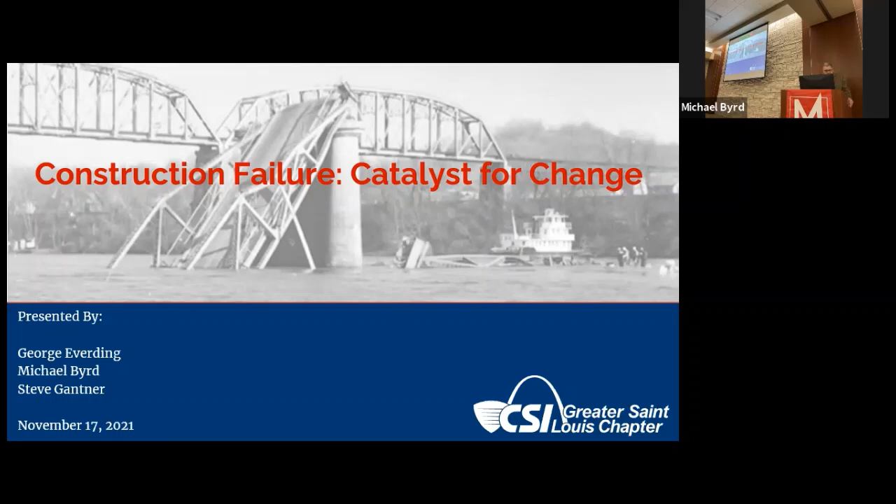I want to see if I can do this here. It worked.

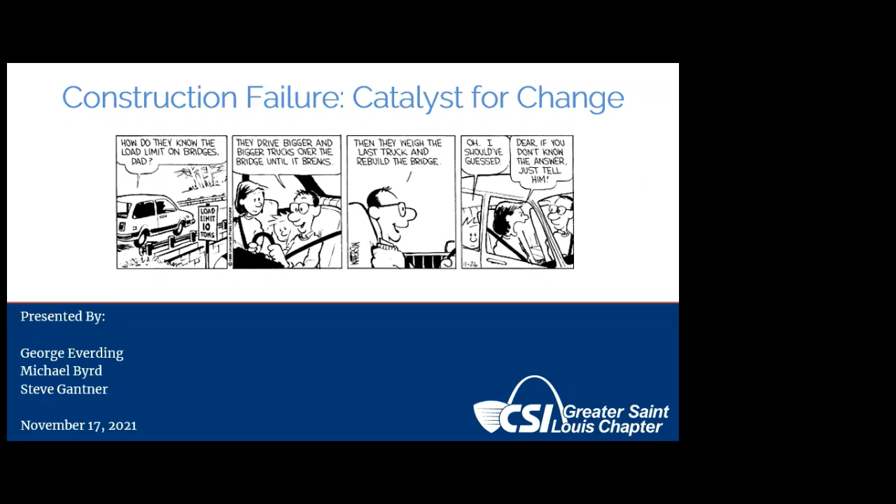Trial and error, as Calvin and his dad are discussing here, has been a means of problem solving for a long time. Calvin and mom and dad are riding across a bridge with a sign that says load limit 10 tons. Calvin asks, how do they know the load limit on bridges, Dad? And Dad, of course, being a dad, has the right answer. They drive bigger and bigger trucks over the bridge until it breaks, then they weigh the last truck and rebuild the bridge. Calvin says, oh, I should have... Mom says, dear, if you don't know the answer, just tell him.

I thought this was appropriate for what we're talking about here, because a lot of what we do in this business historically has been trial and error, and I think it still is very much part of what we do.

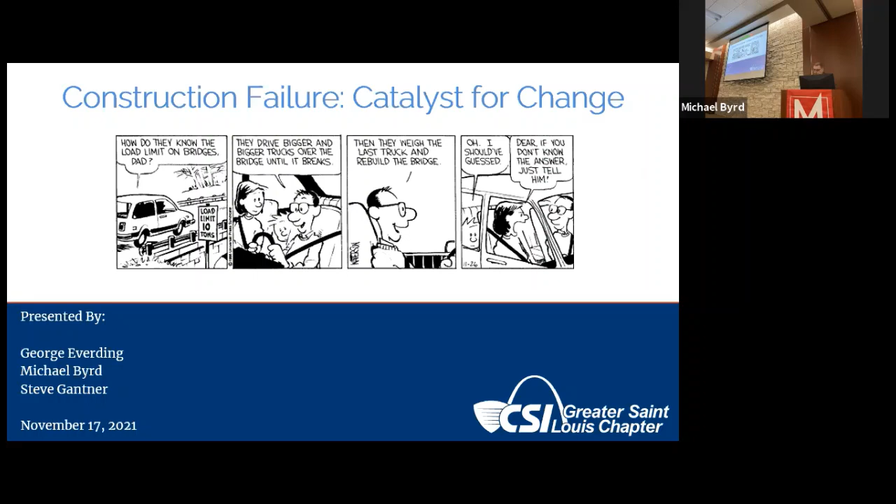The focus is not so much on the failure. We're going to need to talk about some tough stuff. And I have to tell you that in doing the research for the program I was going to put together, it was really difficult. There are a lot of things that could have been talked about tonight.

Neil deGrasse Tyson has a wonderful little, very short 15-second YouTube where he's getting ready to speak and they're doing the sound check, and they asked him to say anything. What he said was, the universe is a deadly place. At every opportunity, it is trying to kill us. And he's absolutely right. Our little Earth, in the scale of the universe, is the only place that we can survive. And for people in construction, Earth is not exactly friendly.

Gravity is not our friend, particularly as we get older. Hurricanes, tornadoes, earthquakes, wildfires—we have to deal with that in everything that we build. And what about human stupidity, or human hubris, or human just lack of basic knowledge? Not necessarily making mistakes, but just not understanding the right questions.

Given all of this, the question really is not why so many failures occur, it's why so few do. And that's the focus for this year. We're going to look at those things that we've done right in response to what we learned when things go horribly wrong.

Because we're all together, we're going to quiz the audience. If you have questions at home, please put them in the chat and we'll ask Hank to ask them. My question to you all is—like a lot of response, one at a time—when you think about failure, what leaps into your mind? It can be a personal project you worked on, or it could be something in the news.

When we talk about failure, George mentions the recent collapse of the condo. Anyone else? Why are you guys shy? The Regency in Kansas City, right? All of us who were licensed at that time had to pay twice our fees in order to defend that. The Missouri board was involved in that.

Anyone else? 35W—I-35W in Minneapolis. George is probably painfully familiar with that.

So someone else, what about like a product rep, something that happened in their experience dealing with a product? It doesn't need to be notable. Windows—design pressures. George is talking about how wind loads on windows was not very well known, and that windstorms and that sort of thing.

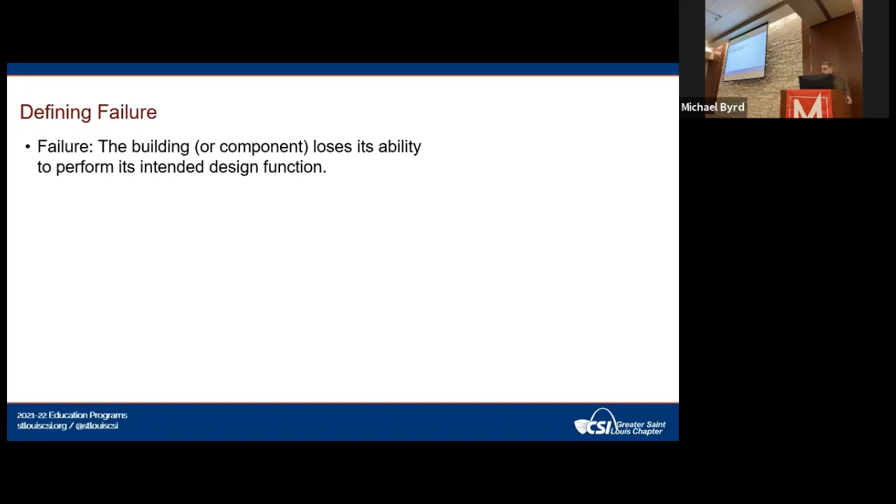A catastrophe. And this is actually from the U.S. Code. A catastrophe is defined as a natural or man-made disaster with extraordinary level of casualties or damage. I think we can all agree with that. There's probably a number of other ways we can define that, but a catastrophe is big scale.

Now, NASA defines a catastrophic failure as sudden and total failure from which recovery is impossible. Think the space shuttles, right? The interesting thing is that these last two are in a little bit of a conflict. You can have a catastrophic failure without a loss of life. If the entire system is damaged to such a point that it cannot be used, that's a catastrophic failure, right? And I'll go into this a little bit more as we go through it.

So here are four different areas of failure. Structural failure, many of the ones we talked about were structural. A performance failure, our product reps, that's kind of what you deal with. Aesthetic failure is the paint fading, right? And a financial failure. The financial failure is sometimes as a result of the other types of failure. Sometimes it's separate from it. You can have a structural success, a performance success, and an aesthetic success, and still have the failure.

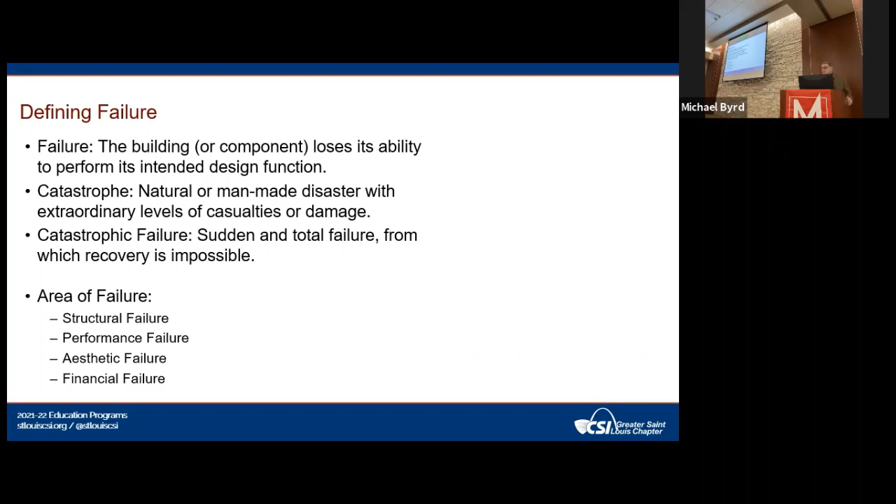And the other thing is you don't have to be in one of these areas. You can be in many of them, right?

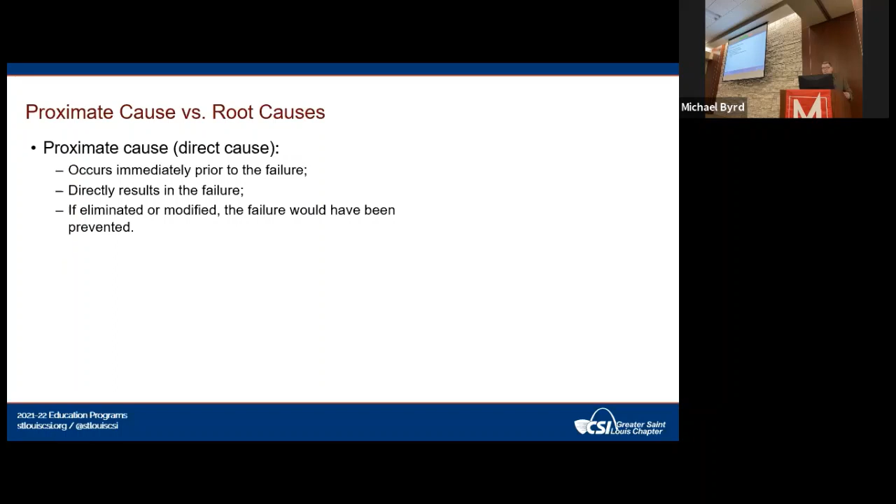The cause of the failure: proximate cause, think of proximity. It's the direct cause. It's what happens immediately before the failure that results in the failure. And if the proximate cause isn't there, you don't have a failure. I'll explain this a little bit before we get off the slide.

Root causes are underlying causes. There are generally multiple root causes in a failure. They contribute to the proximate cause. So to give an example of this...

I think you mentioned Hyatt, right? The Hyatt Regency. The proximate cause is a weld failed, allowing the supporting rod to pull through a box beam, causing the walkways to fall. If that hadn't happened, if it had survived that T-dance with people jumping up and down, there wouldn't have been a failure. Now, it may have happened the next week, right? But that's why it's a proximate failure. That's what actually caused the problem.

But the root causes are that the design was structurally incorrect. And the design was structurally incorrect for a couple of reasons. One, the dance party was a much higher load than anyone anticipated. And two, the design of the connection was changed, because the design of the support was difficult or impossible to build.

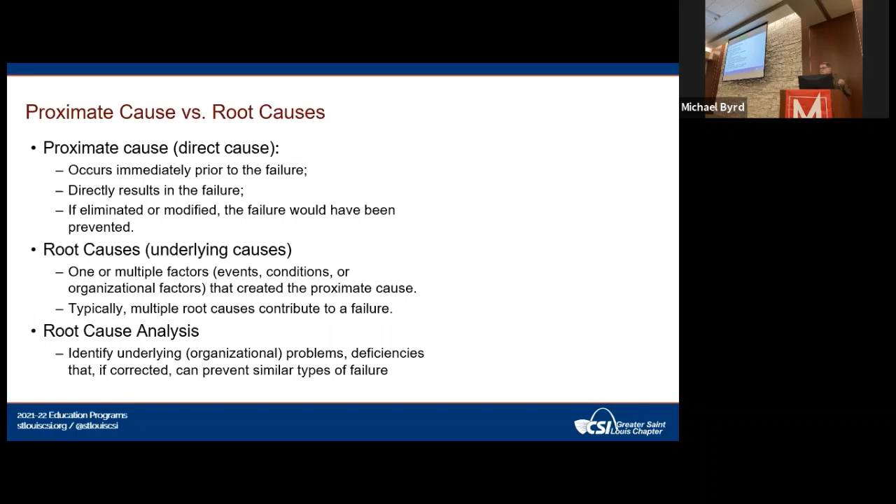So the important thing to keep in mind is that the reason you want to go to the root causes is you can identify the underlying problems. And all of us, whether we're an architect or a product rep or a contractor, in our organization and in our process of doing things, we want that to be correct, so we can avoid the problems that cause failure. So root causes, analyzing them, understanding and identifying where the problems are, and ultimately correcting those problems, is key to what we're going to be talking about here.

And then final slide here, to classify failure: human error, natural causes, or both. Right? Those are basically the choices here.

Fire, explosion, weather—you can read the list. I'm not claiming this is a comprehensive list, but I think it's probably pretty good. I'm going to use these as we go through each of the examples they talk about and try to identify where these failures occur.

The interesting thing is that you can have a crossover here. The San Francisco earthquake—I didn't put the year, it was 1906 or something like that—devastated San Francisco. But 90% of the devastation was not the earthquake itself, it was the fires that came along afterwards.

Failures—I think Steve Bowles and maybe Drew were at one of the meetings we had, and I said my impression was that material failures, the material itself, the product, very seldom fails. We've got a really good manufacturing industry. I asked Drew, in the paint industry, what's the percentage of failures that are not material? They are either installation or surface prep.

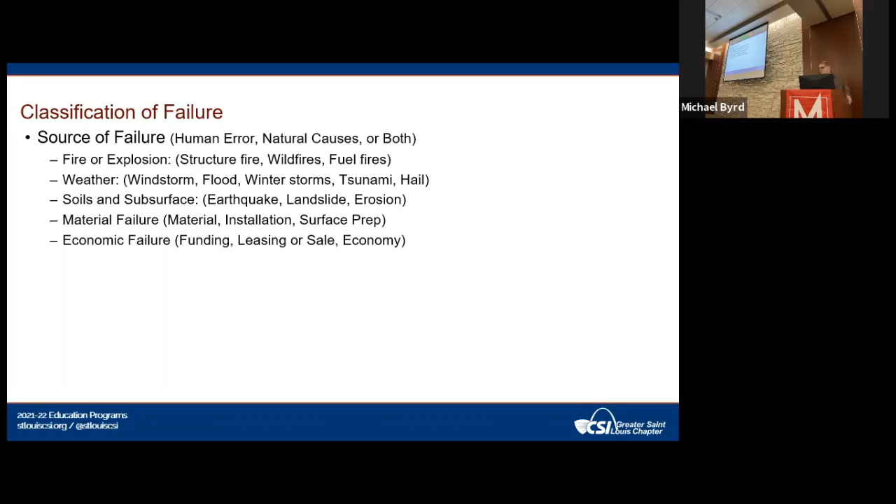Those of you that were at my talk about the Eads Bridge—we love the Eads Bridge, wonderful thing for St. Louis. The Eads Bridge was built, and within 5 years it was an economic failure.

So who's to blame? Point some fingers—me, yeah, that often happens, right? We get to dealing with the failure and we start pointing fingers, and the blame can be grouped into any of the three major parties: design, construction, or owner/developer. But sometimes we get to the point where we say it's nobody's fault—it just happened.

We're going to look at the hard things, and I'm going to need to go through these.

That's great, Tom. Do I need to repeat the question for the audience? Yeah, that's a good idea. We'll take it back to the... oh, okay, yeah. You don't mind.

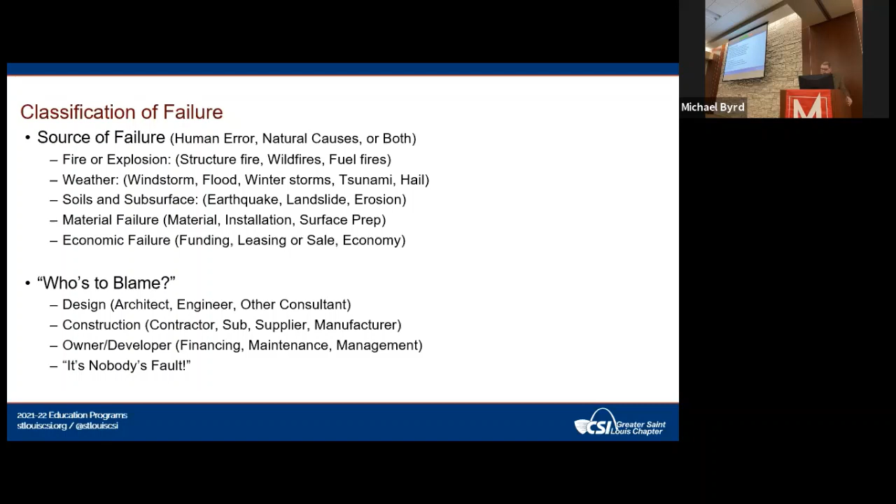Okay, let's get into this. You're fine—half the room, maybe a little more than half the room... This is something I didn't actually learn about in any depth until I got involved with the door hardware industry.

The Iroquois Theater had a horrible fire on December 30th, 1903, and it had been open for only 6 weeks. It was a theater in Chicago, obviously taking advantage of the Christmas season. They had just opened the Mr. Bluebeard play—here's a copy of the playbill, and in the upper left-hand corner it says 'absolutely fireproof.' The theater was advertised as the biggest innovation in Chicago theaters, the showplace and the palace. The proximate cause: sparks from a stage light ignited the stage curtain.

And the building burned. You can see the results of it. One of the reasons that the first couple of tragedies I'm talking about so resonated with people was that newspapers were a big thing, and they were competing, and there were a lot of published photographs of the results - bodies, burned bodies, so forth. I'm not going to show them. If you have an interest in that sort of thing, you can find them online. But it was just horrible, just horrible.

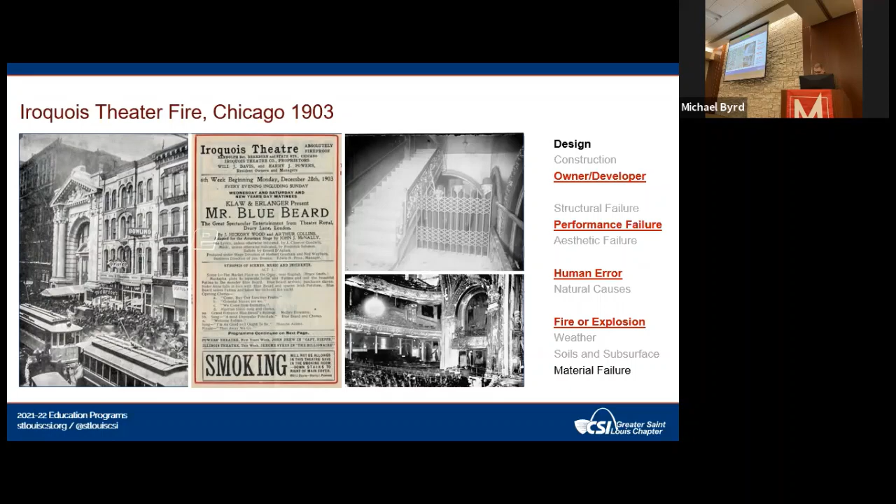And in terms of operation, in terms of management, cities prohibited standing in environments like this. So you can see that our world today is vastly different and vastly safer as a result of what happened - as a result of the theater fire, the Iroquois theater fire. And we'll go to another one.

This is maybe more famous. Who's never heard of the Triangle Shirtwaist? Don't be ashamed, I'm not gonna point you out. One, maybe two.

The triangle - well, let's define what a shirtwaist is. In the early 1900s, women would wear an overgarment when they worked that would keep their dresses clean, right? So it was sort of like a vest. And this was a real popular thing in the 1900s, the nineteen-teens. This is a sweatshop - in the classic case we've all learned about sweatshops, and this certainly was one.

146 people died in this fire, and they were mostly immigrant women, and there were a lot of girls, some as young as 14. You can see a kind of a nice picture of the work environment here. Picture that with the conditions when the fire broke out.

These women are working on a piecework basis, working as fast as they can. That aisle that you see that's all nicely wooden there would be covered maybe a foot deep with scraps from people making shirtwaists - there were bins full of scraps. Proximate cause: an unextinguished match or cigarette butt was thrown into a scrap bin. And you can picture what happened as a result of that.

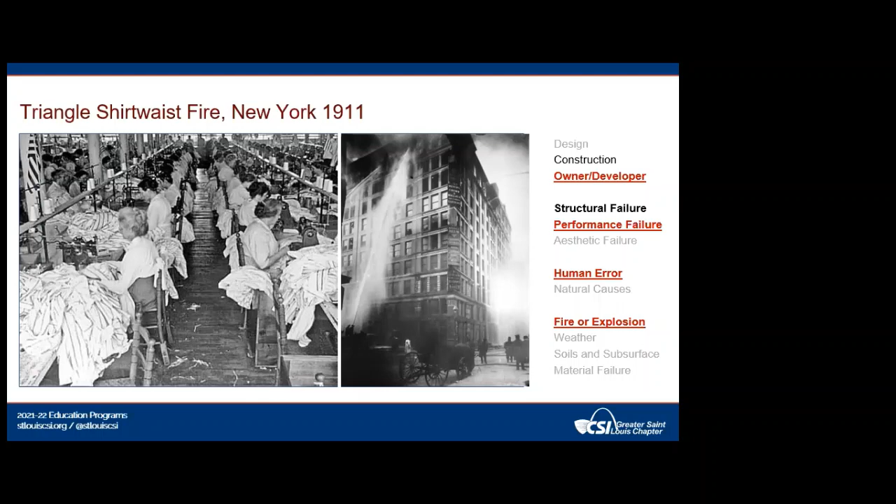There were no audible fire alarms. The exterior fire escape, which they were able to get into, had been damaged prior to the fire and not fixed, and it collapsed. Elevators remained in use during the fire - a lot of deaths are related to that.

An interesting fact about this - we talked about the Iroquois fire, some questionable code practices. Cornell University is sort of the owner of documentation on the Triangle Shirtwaist fire, and they did a study 10 or 15 years ago and made the case that the Asch building, where this factory was, completely complied with code as it was written. This is an issue not so much of building code as ownership and management.

The big deal about the Triangle Shirtwaist factory fire is it led to labor and better working conditions. It led to training with fire drills and procedures, a prohibition of locked exit doors, a re-examination of elevator use during fires, and changes to management and maintenance practices.

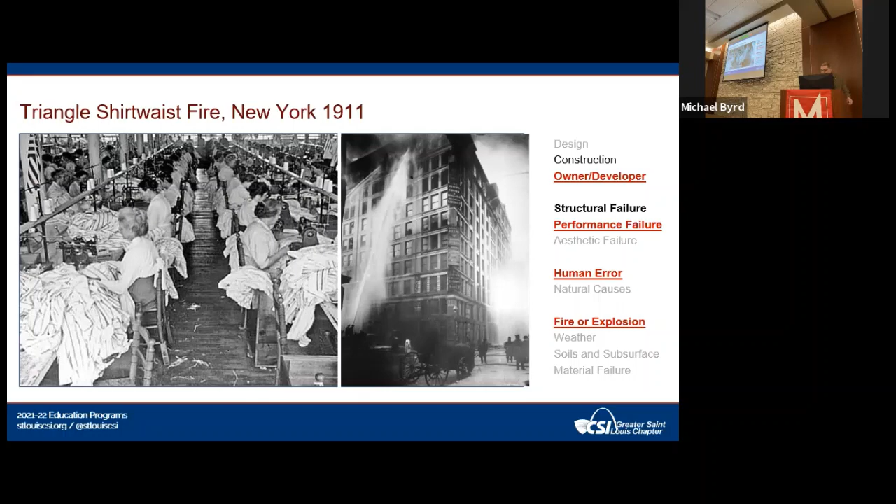So these were the tough ones. I'm going to get a little bit better. Two more difficult ones, and then we'll get some where people don't die. MGM Grand Hotel fire in Las Vegas, 1980. First time you heard about it? Oh okay, that's good.

Deaths and injuries in fire don't always come from flame and heat. The first two we talked about, that was obviously the cause of death. 85 people died in this fire, 650 were injured. Of the 85 that died, only 4 died from flame and heat.

You can see on the photograph of the building and fire, the smoke on the outside is coming from a 1-story wing that had restaurants and delis. The casino owner negotiated with the building department to not put sprinklers in that section, justified by saying it's a casino open 24 hours a day, 365 days a year, so there's always going to be somebody there. But a couple years after it was built, the deli didn't need to be open at all hours.

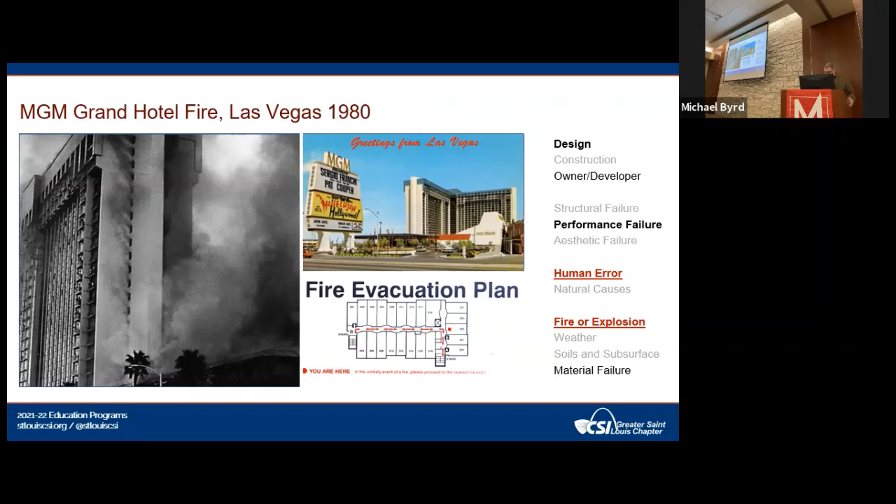So that was a big deal. Flame spread doesn't have to happen only on the inside - fire and smoke doesn't have to happen on just the inside.

The Grenfell Tower fire, which is recent, 2017. Grenfell Tower was essentially public housing. You can see a picture in the upper right of what it looked like when it was built in the 1960s, a kind of plain, brutalist concrete building. Below that is how it was modified just a few years before the fire.

This investigation is still ongoing, but it's pretty clear that the sponsoring district that built this housing - in Britain, every borough is responsible for providing their own public housing - was a lower middle income area. By all reports it was a decent project and people enjoyed living there. I think what happened is the neighborhood got gentrified, and people didn't like seeing this rather plain building in the middle of their town. So they paid to have MCM, metal composite material, put on the outside of the building.

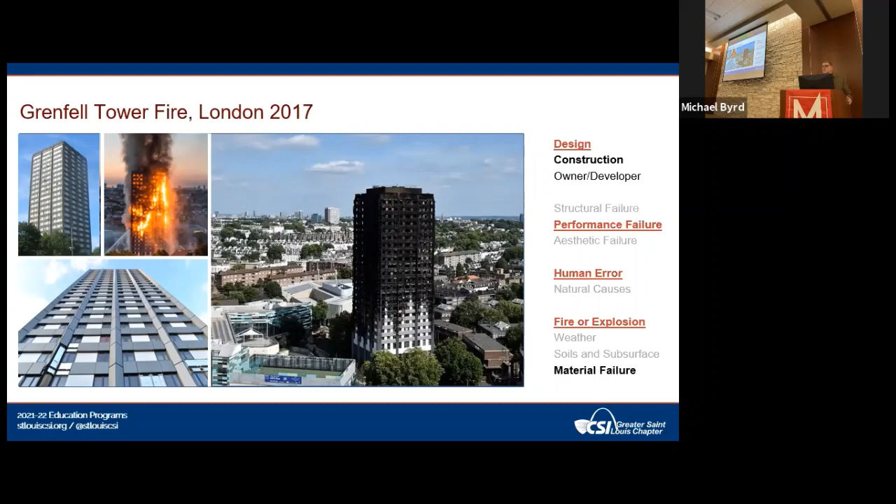The John Hancock building, John Hancock Life, is shown there in the middle. In its current glory, it's a beloved building right downtown, next to H.H. Richardson's Trinity Church.

When it was built, and as it was being built, there was a storm with 75-mile-an-hour wind gusts. 65 of these panels in this building were sucked out, started flying through downtown Boston. As construction went on, as there would be windstorms, more and more panels fell.

It got to the point that it was such a dangerous condition that they started, first of all, as you can see on the right here, infilling the panels with plywood panels. Ultimately, almost every window in that building was covered with plywood. Bostonians called it the plywood palace.

This happened right after I got out of school, so it was a big deal. And I remember, as many of us do, whenever there's a failure, we try to understand it and speculate about how it happened.

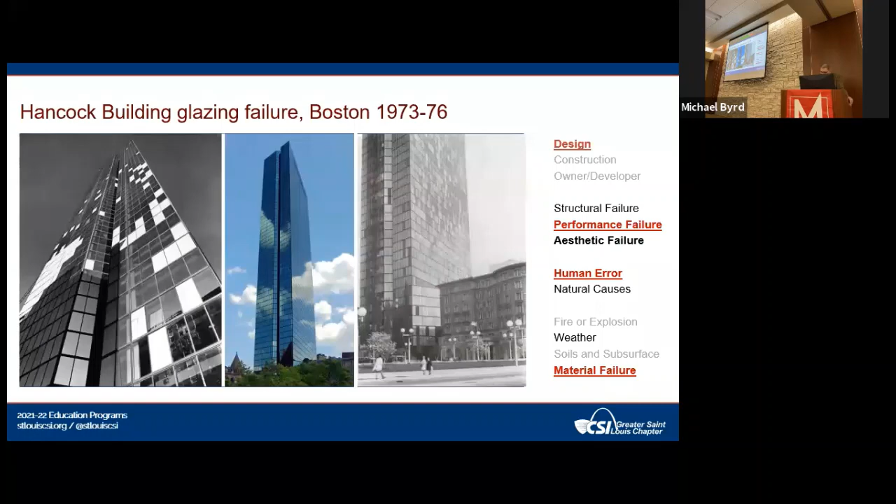Chicago. This is another famous architect - no names here.

This architect was a neoclassicist, so when this building was built in the 1960s-1970s, it was at that time the tallest building in Chicago. His vision was to use Carrara marble. Carrara marble is Michelangelo's Pietà, Michelangelo's David, the Pantheon - very, very white, very, very beautiful stuff. It has lasted for years in many important works of art and buildings.

The image was that Standard Oil would present itself as this white, shining, neoclassic tower.

At this time, new technologies in stonework allowed the panels, which were approximately 4 by 4 feet, to be sawn into 1 1/4 inch thick sheets, as opposed to the typical 2 1/2 or 3 inch slab. So the building was built, everybody loved it, Standard Oil loved it, and the panels fell a few years afterward.

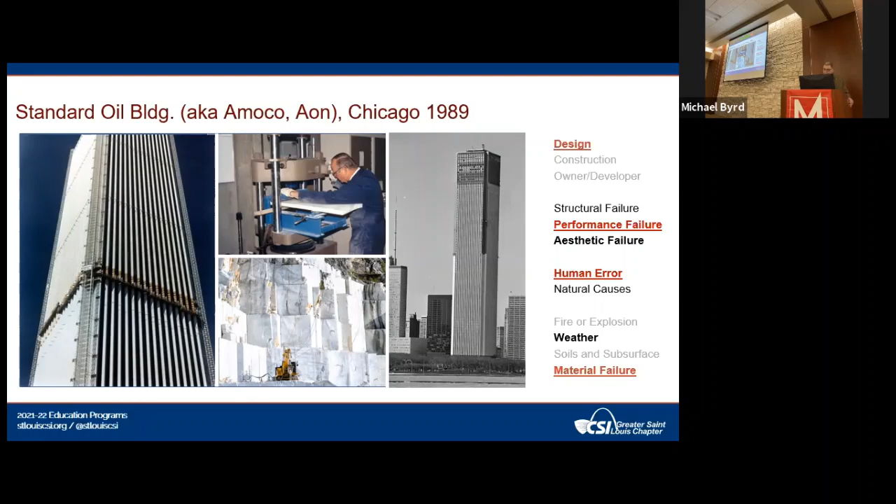Staying on the exterior, death ray architecture. Not mentioning the names of the famous architects, but they are famous architects who designed these buildings. The first one is the Disney Concert Hall in Los Angeles. I'll leave you to guess who the architect was. Essentially, the drawing there shows the concept of what's happening.

When you have a curve like this, rays of the sun can hit it and focus, and that's what happened here. The concert hall was focusing rays at certain times of day across the street and causing burns. People were actually getting burned by it. The other thing you always see is local news going and frying an egg on the sidewalk, or boiling hot dogs. They did that with every one of these buildings.

The Vdara Hotel in Las Vegas is the next one. This was focusing rays on the pool deck. Vegas is not a particularly mild climate anyway, but people were getting third-degree burns. The answer to solve that was to put more umbrellas on the pool deck—a great architectural solution, right?

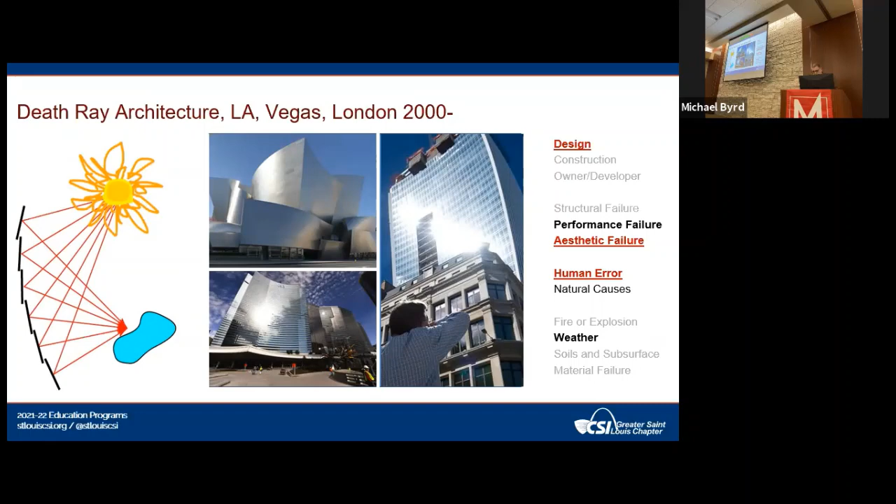And then we'll go on to another unnamed architect who designed a museum in New York City in the 1950s—a very notable piece of architecture. It was turning 50 years old and the exterior was cracked, so they decided to completely renovate it and get it back in the shape it was when it was built.

This is a sprayed-on concrete system, painted on the outside. The first thing that had to be done was removing 17 layers of paint to get down to the concrete. Then they did a laser survey of all the cracks, and this looks really bad—there are some micro cracks here, and some pretty bad cracks.

Architects of a certain age learned the rule of thumb that you put expansion joints in concrete every 30 feet—that was a rule of thumb that seemed to work. I actually showed this in a Washington class yesterday and talked to the professor about it. The thing we both noted is: look at where the big, fat cracks are.

That's God saying, 'This is where you should have put your joints, Mr. Architect.' I'll get off this slide by quoting Ed Block, who was a big deal at the Masonry Institute. Ed used to teach a spec class and he'd tell young architects: you don't need to put expansion joints in your building, you don't need to do it—but if you don't do it, Mother Nature will take care of it.

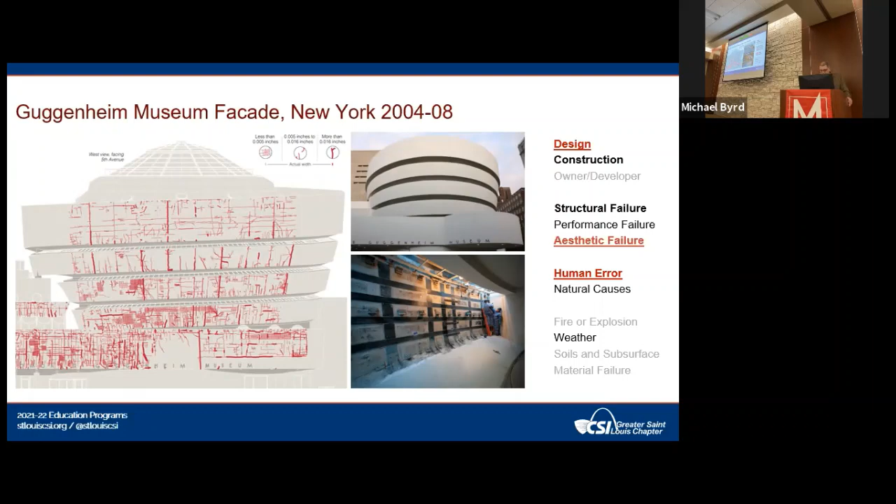Again, no deaths were caused.

This notable building, which we all know and love, began to lean in the 12th century as it was being built, and the cause of the lean was soft ground.

Construction was halted for 100 years as there were wars. Pisa was fighting other city-states. Nothing went on, and this probably saved the tower, because while nothing was being done, the part of the tower that was already built settled and stabilized. And then they built the rest of the tower.

By 1990, this tilt had reached 5.5 degrees. And there was concern that it actually would fall. So you can see the fix: they piled lead weights on the backside of the tower.

Was this in place when you were there? Yeah, this was probably before that. This was, I think, 1993. At any rate, that helped to stabilize it.

I guess the question here is, who's to blame? Can we blame the designer, contractor, owner, developer? This happened a long time ago. Did they have the knowledge to understand what was going on? I'm saying that this was obviously a structural failure and a performance failure. Is it an aesthetic failure?

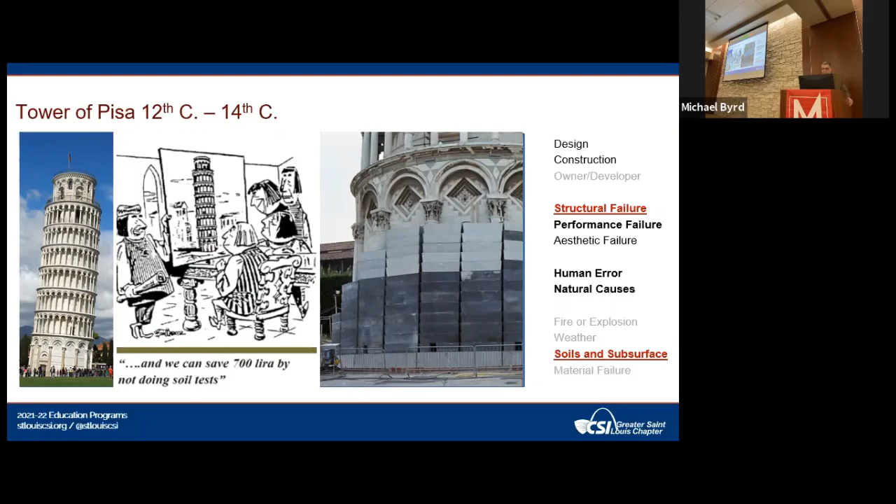It's because my wife and I had just gotten back from Italy at that time. And we were in Venice. Our first morning at the B&B, we're having breakfast. And we're talking, and it was just a wonderful time. And I noticed that Maureen is looking, not at me, but looking over my shoulder. And she gets this weird look on her face. And she said, is that the bell tower falling?

Well, this photograph was on the wall behind us. And in fact, if you did Venice, the bell tower we're seeing is a reconstruction of the tower that fell in 1902. The tower itself, the one that fell, dates back to the 9th century.

And it had been added on to over time. It was so important to Venice. It was actually the clock. The bells would ring at certain times to announce certain things that had to happen. There were lightning strikes, earthquakes, fires, all sorts of things.

The top part of it, the roof part, had burned down and been rebuilt. And by 1880, there were vendor stalls around the outside. They decided to get rid of them, and they found that the base was in really bad shape. And rather than do an extensive repair, they sort of patched it up.

In 1902, they were repairing a girder that supported the roof. They cut it out, and as they were pounding the new beam back in, the tower started to shake. And it shook and shook over a period of a few days.

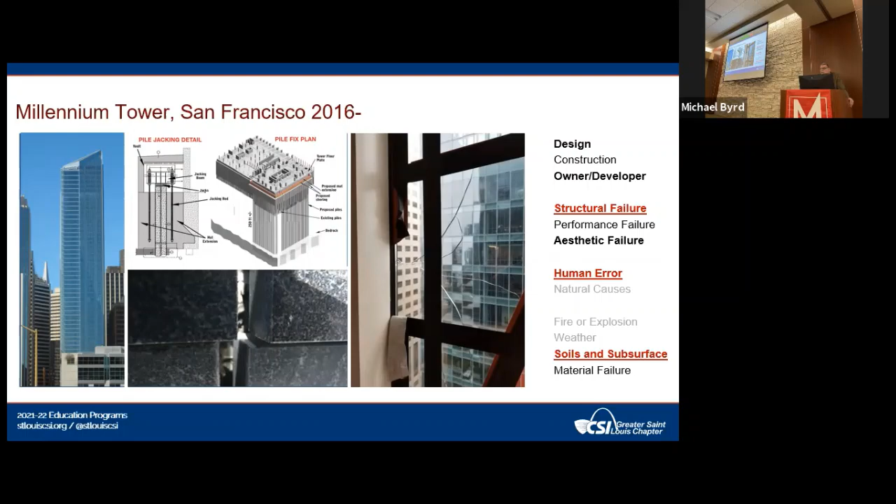I guess our question is, with this failure, what's going to happen? Are they going to continue to try to save it? Michael Byrd's going to be talking, after I finally shut up here, about a building that actually was faced with that question.

This is something that probably no one in this room has heard about - the Algo Mall collapse in Elliot Lake. This was a mining rich small town. In 1980, they built a mall, hotel, government office, library, health center, underground parking, and rooftop parking, all in one building. This was truly the community center - this wasn't just a place to go shop.

Mining dried up in town. Malls themselves are less popular now, although even though the stores closed, they still had the library and stuff. But in 2012, a car driving on that ran over a joint, and a bay of the parking deck collapsed into the mall below, and two women were killed.

A decision was made early in the construction to go with an innovative waterproof system that had just come out. The theory of this system was that you wouldn't put a waterproofing membrane over the entire structural slab - you can see here, this is called hollow core deck. Rather than waterproofing that, they would rely on the imperviousness of concrete and only seal and put membrane over the joints.

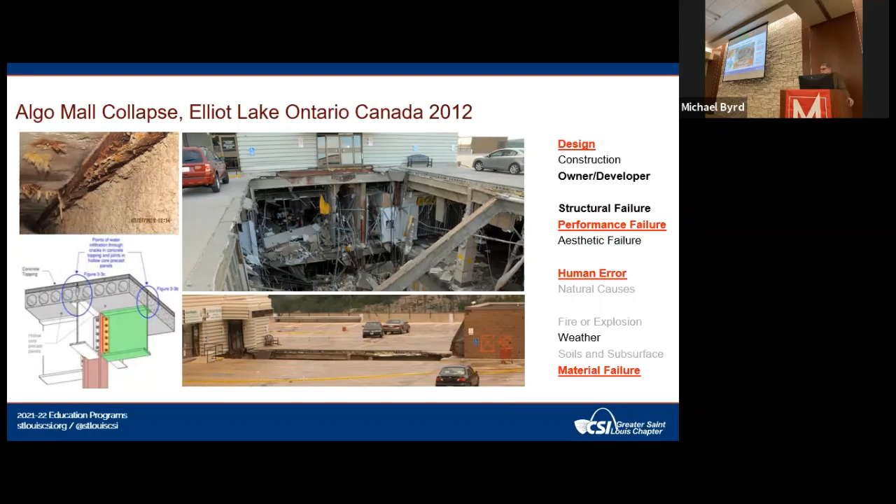And we'll end with this L'Ambiance Plaza in Bridgeport. Lift slab is something that's not much done anymore, but the concept is you pour your base slab, and then you pour three slabs on top of it, and then jack them up into place around the columns. It was a very successful, very safe method of construction, used extensively in the 70s and 80s.

There's a horrible failure here. You can see in the drawing, they got up to the 6th level, and there was a collapse as the building was being worked on.

28 workers were killed in a horrible manner. You can see a composite of photographs taken the day after, showing what a mess this was.

The important thing about this failure is the litigation that took place, or didn't take place. This happened in 1987. Immediately, a federal 2-judge panel put together a settlement. There were 100 parties involved, 40 of them contractors, architects, and so forth, who would have been the defendants, and the rest plaintiffs. What the judges did was basically bring everyone in, everyone who was remotely connected.

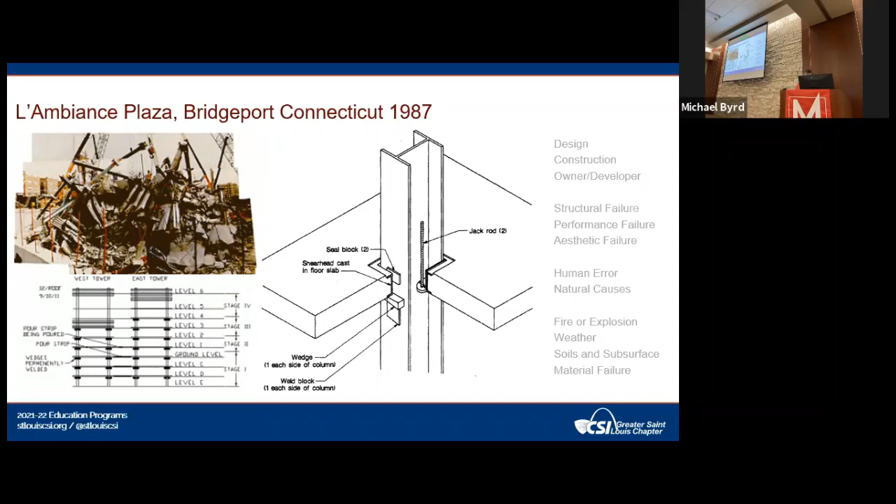Okay, well, I think George just invited Steve and I to participate here because you just needed 2 more to round it out and make it a magic 20 or something like that.

So I've only got 1 building to talk about, and this one is like, when is a failure not a failure? When is a catastrophe not a catastrophe, right? This is an economic failure with a physical structural proportion to it. As someone called it, it resulted in temporarily the most expensive billboard.

The Harmon Hotel. So for those of you who are not familiar with Las Vegas, the CityCenter project is a massive development—many millions of square feet on 76 acres, the largest privately funded development in U.S. history. It started off at about $4 billion of budget to be a completely self-contained lifestyle center.

Everything: residences, retail, entertainment, of course. There was a grocery store planned, the first one on the strip, although it actually hasn't happened. There's even its own quote-unquote sustainable power plant on the site. It's massive, and as if that weren't enough, it connects to other MGM properties.

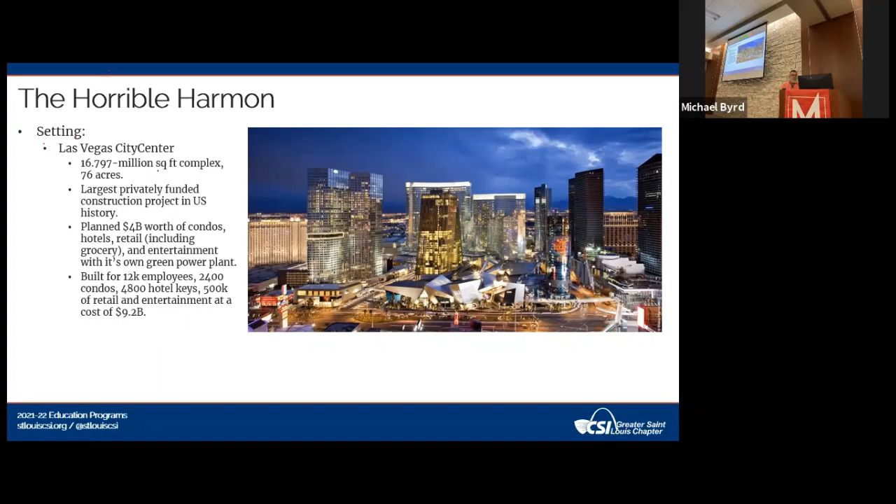So this is like a drama, right? This is a very sad kind of drama in 3 acts, and this is our cast of characters. Now I've left out the many attorneys that are involved. We'll consider those extras, supporting players.

Just so you know the names of those involved: MGM Resorts and City Center, for these purposes, are the owner. MGM Resorts owns 50%, with Dubai World owning City Center. They are the owner, and they hired Adamson Associates Architects to be the executive architect for the entire City Center project, and Tutor Perini to essentially be the lead contractor for the project.

Adamson hired the design team, which is Norman Foster and Partners, and Halcrow Yolles, which was at the time a Toronto-based structural firm owned by a UK firm that got bought recently by CH2M Hill, which got bought by Jacobs. So consider it Jacobs. Tutor Perini is a massive contractor who is still involved with massive projects, most recently Hudson Yards. Tutor Perini hired Pacific Coast Steel, which is now part of something larger called Pacific Steel Group.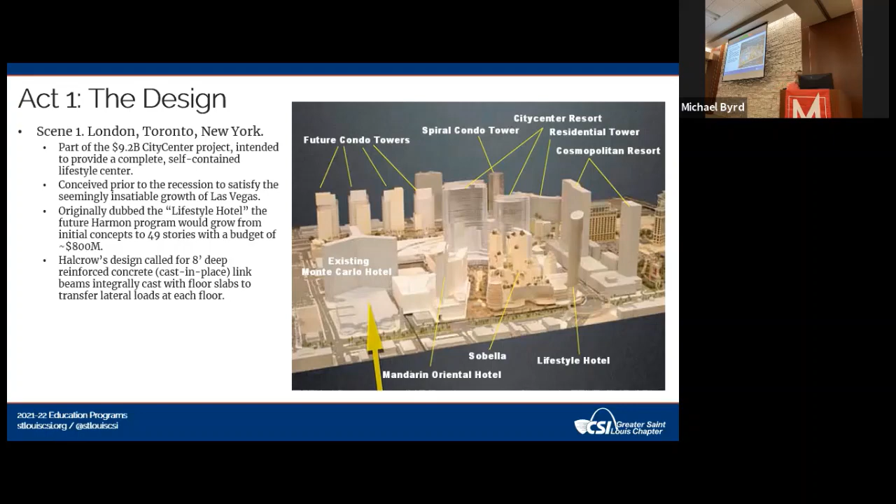MGM figured they had this sewn up, and they implemented what would become a scale of construction management, auditing, and project delivery that was heretofore unheard of. They had armies of auditors crawling all over the project, looking after many multiples of key performance indicators. It's become the model for how other big projects have been delivered, like Hudson Yards and other international projects — projects spending billions of dollars and basically creating small cities with a huge impact on the local economy.

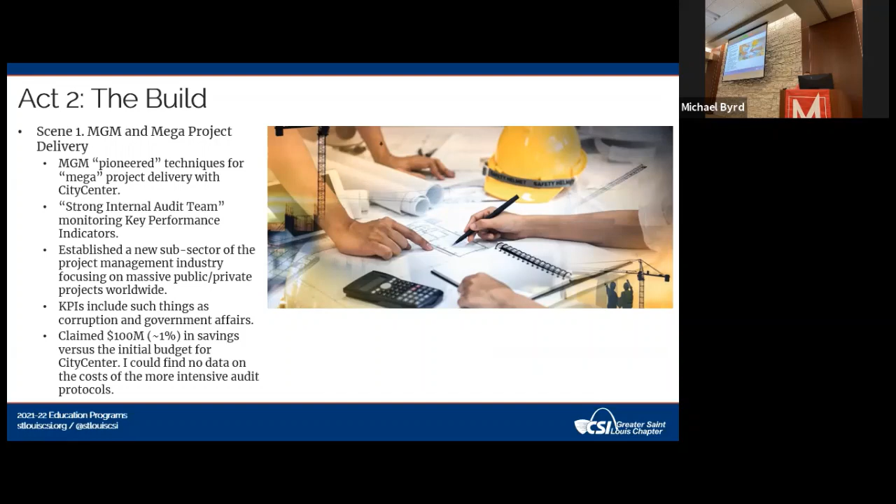Some of those indicators factor in things like local government, what's happening with legislation, and also corruption. Depending on where you are, that's a bigger or smaller concern, but it's definitely something that gets factored in. Incidentally, they claimed this process saved them $100 million, which, as it turned out, was not that much. And I could not find any information on how much the process added to the project.

Construction starts, and everything seems to be going swimmingly, as anybody can tell. And it goes up, the first few floors go on up, and nobody notices anything wrong.

At floor 4 or 5, things start to get sketchy for Pacific Coast Steel. And in their later opinion, there were design problems, perhaps coordination issues between Foster and Halcrow that made some of those rebar placements very, very difficult.

This is where we start to talk about what is proximate cause and what is root cause, because things started to go badly with the contractors on site, and they started to make some decisions without any other approvals.

So they figured, well, we can't really fit all this rebar in, so we're not really going to put it all in. And sometimes it was so tight that they could get it in, but they couldn't make it small enough to fit into the concrete.

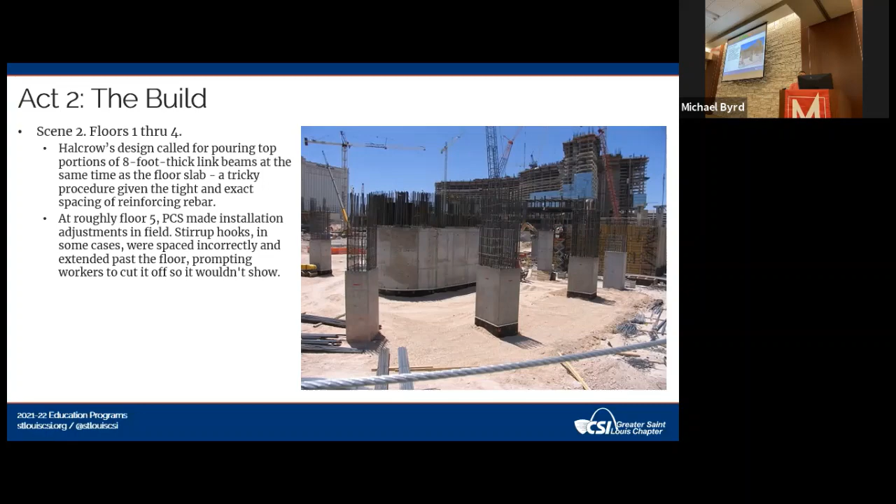So to prevent it from sticking out, they would cut. They cut many stirrups and rod caps and things like that. And all of this was getting covered with concrete as things proceeded.

Now you've got eyes on this project. So, as all projects are, this is a team sport, and this is where you start to talk about what part of this failure is attributable to what thing.

The bad workmanship certainly is proximate cause. I think you could also argue that the bad oversight was perhaps the root cause, because there's going to be problems. I mean, the system is designed to be tolerant of mistakes, and some shoddy workmanship, because we have oversight built into the system.

The oversight is not a luxury. The oversight is a responsibility of multiple parties, some of which are independent, so that they can speak on behalf of the owner without bias. However, both the structural engineer and the third-party special inspector, and to a degree Clark County, failed in that regard.

So as things progressed, floors 5 through 20, these problems got overlooked—literally buried in concrete in some cases, and in the case of Converse Consultants, seen but not noticed, or perhaps noticed but not noted.

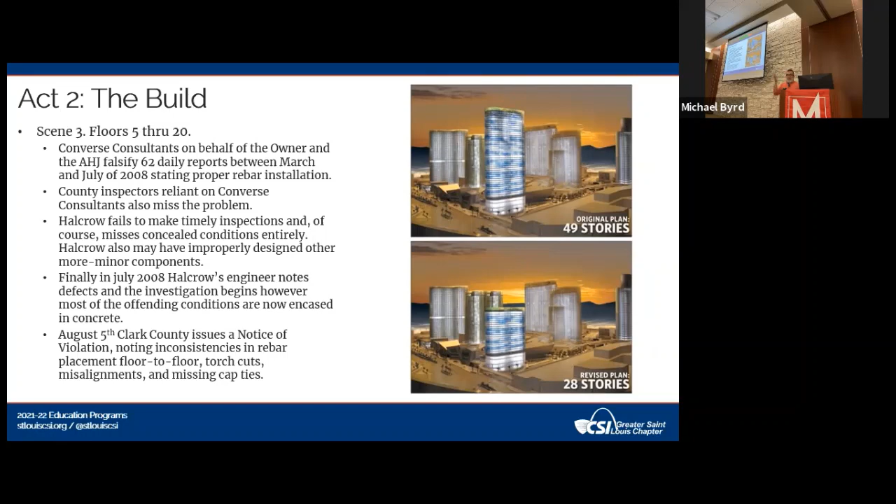There was no real explanation found for why the incorrect approach wasn't even consistent. It just seemed to be sloppy in these link beams going all the way up. And all that leads to some interesting consequences, because as we've said, this one did not result in any deaths.

The building was not occupied for its intended purpose. They stopped at that 20th—depending on how you count, 28th—floor, and didn't proceed with their construction.

It was determined that the building had structural deficiencies that would imperil it in a seismic event, but it was not going to fall just on its own in normal circumstances. So nobody died. Were laws broken?

It was a little complicated. Certainly policies were broken, and Clark County Development took some of these folks to task, as did the Nevada State Contractors Board. They imposed their own judgments and fines, which, given the nature of things, may seem a little light, but of course, the real justice comes a little bit later.

Pacific Coast Steel paid a small fine, and the firm did not have to admit fault to the state board. Converse Consultants was basically suspended from working in part of the state of Nevada for 6 months. And the inspectors that falsified the reports lost their credentials—I think there were 2 inspectors in question.

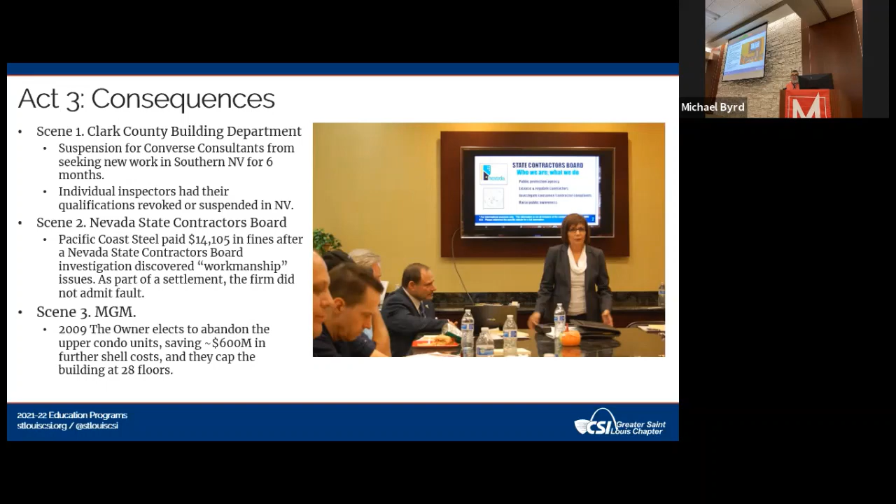So MGM Resorts decided to limit the project at first, which of course would save them a lot of money right up front. And then they had to go about figuring out what they could do with the property as it was. They decided to cap it and leave it as a hotel without the upper floor condos. But that didn't last.

Because now everybody's in court, and the longer it goes, the worse the economic output of the project gets. MGM decides that it is actually in their best interest to simply demolish the project. They don't need the additional 2,000 hotel rooms on those lower floors.

They've already built other hotels by other prime architects in City Center alone. So they are now arguing that the building shouldn't be allowed to stand, that it is dangerous. They marshal experts to do reports attesting to the building's structural insufficiency. Meanwhile, Perini is arguing the opposite, because they have hundreds of millions of dollars on the line that they have not been paid for building those first stories. So they argue strenuously that the building can actually be salvaged and repaired, and they get their own engineering done that says for $20 million, they can occupy those floors safely.

It goes to the state, and the state at first says yes, you can demolish it. Perini argues against it and gets some court to rule that there's a problem with the testing, suggesting the building has an overarching problem, not just localized ones. That determination goes to the state Supreme Court, which agrees with the initial ruling that the building can be determined fundamentally unsound. So demolition can proceed whether Perini wants it to or not.

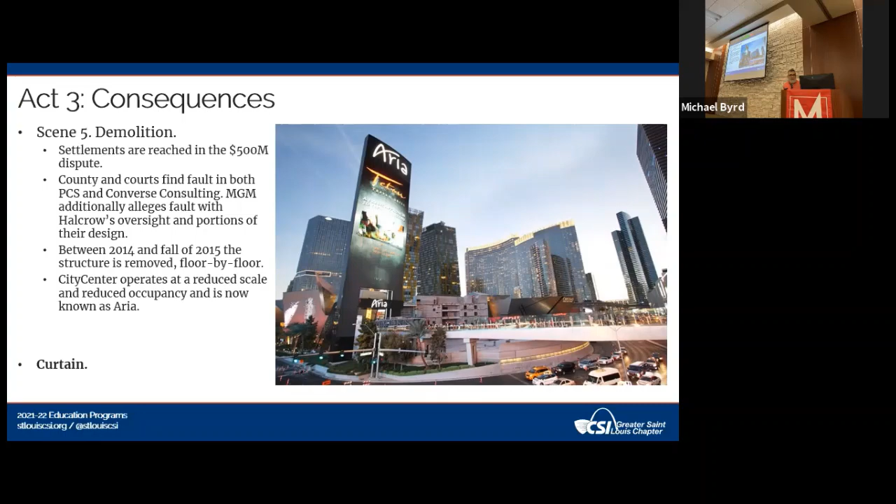And so this sad play comes to an end, and everybody now has looked back and made some determinations as to what could be changed, why, and who really deserves to pay and why.

Clark County, of course, has to rely on those third-party inspectors. Their process of employing monitors to spot check the work of those inspectors continues. Everybody takes it a bit more seriously now, but they have not made changes to their funding process. They did note in their analysis that their monitors tended to examine rebar on the foundations more strenuously, relying more on those inspectors for the upper floors, which is a procedure they are reviewing or have reviewed and made changes to. I'm not sure if those changes fit in reality.

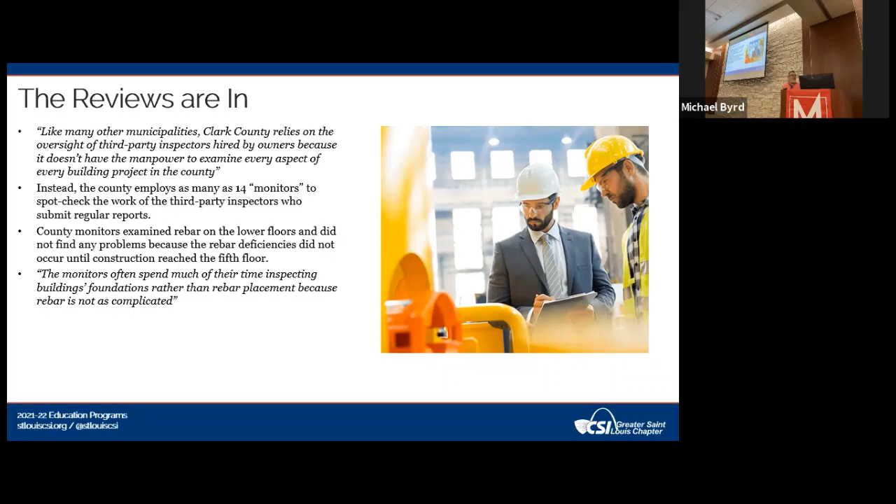The lawsuit between MGM and their contractor led to a couple of things that I thought were interesting. PCS, Pacific Coast Steel, got sued by Tutor Perini. This is one of those situations where it matters, because we're not talking about criminal things, we're talking about contractual things, and it matters who works for who. It's difficult to make third-party claims given the nature of these agreements. So the big numbers come down to MGM and Tutor Perini, PCS, and secondarily between MGM and the structural engineer through the executive architect, who gets sued by them as well.

PCS, because they got sued by Tutor Perini, turns around and files a complaint against the structural engineer. PCS does not work with the structural engineer, of course, so they are trying to assert professional negligence.

However, that's a difficult standard to meet, and they instead tried asserting negligence, that they negligently misrepresented the circumstances. The professional negligence question came down to whether the fact that Halcrow didn't do their inspections in a timely fashion suggests they didn't do their design work in a professional manner. Were they in fact professionally negligent? That turned out to be very difficult to show.

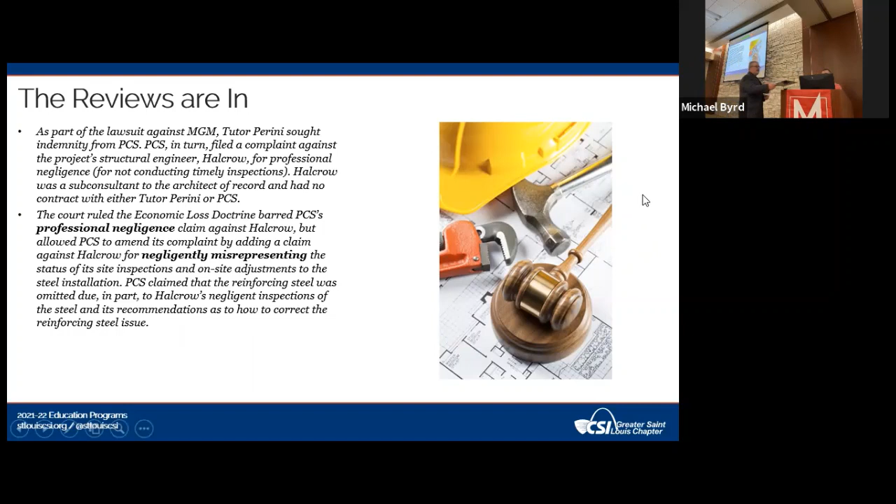For right now, any questions? While you're setting up, if I could ask, the concept of special inspections is fundamental to practice and construction these days. Does all of this bring that into question, or is it still valid?

No, I've read nothing that suggests anybody is questioning the process. Maybe that's because no lives were lost, and because even though it is a monumental economic failure, in the grand scheme of things, even at the scale of City Center surrounding here, there was a question related to the testing quality by PCS, or I'm not sure.

Converse Consultants was the third party, and they completely failed, of course, and they misrepresented 62 different reports.

Yeah, but there's no questioning the relationship between the owner hiring the special inspectors who are essentially acting on behalf of a public agency. Not that I have read. I've read nothing suggesting any of those parties are reconsidering that relationship. Maybe because nobody has a better arrangement.

So while I'm getting set up, just got one question for Drew and Hank. While you're paying attention to George's presentation, I just got two words for you guys: structural paint.

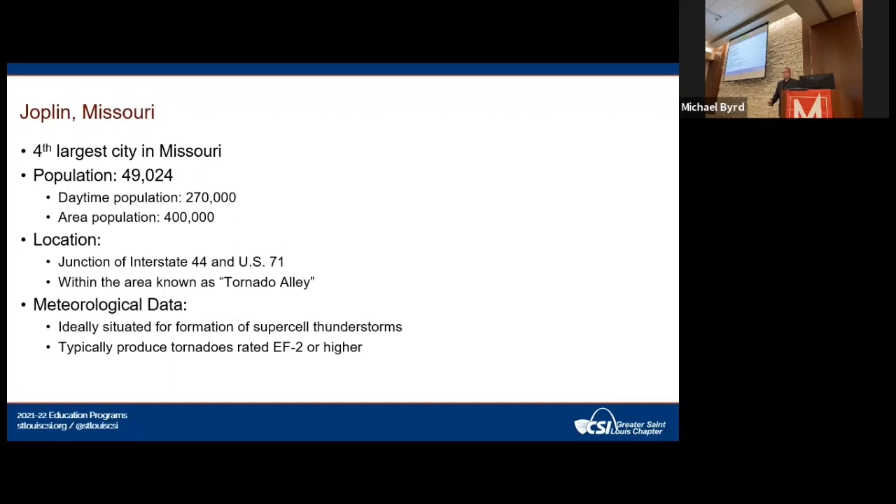Is everyone familiar with the Enhanced Fujita Scale? That's the EF rating for tornadoes. It goes from 0 to 5, 5 being the highest.

So some facts for you about what happened in Joplin. On Sunday, May 22nd, around 1:40 p.m., the National Weather Service issued a tornado watch. A tornado watch, if you're not aware, means the conditions are highly favorable for a super strong thunderstorm, possible tornado.

A tornado warning was issued at 5:17. A sheriff's deputy saw a funnel cloud, so he reported it, and they sounded the sirens at 5:17 and again at 5:31. At 5:41, the tornado touched down in Joplin. Doing the math, that's 24 minutes of prep time between the warning and when it got to the city of Joplin—24 minutes to seek shelter.

For this tornado, it was an EF4-5 at its peak. And with an EF5, they stopped measuring winds at over 200 miles an hour. Just to give you an idea of how strong this storm was—it wasn't just one vortex, it was a double vortex, the EF4-5 tornado.

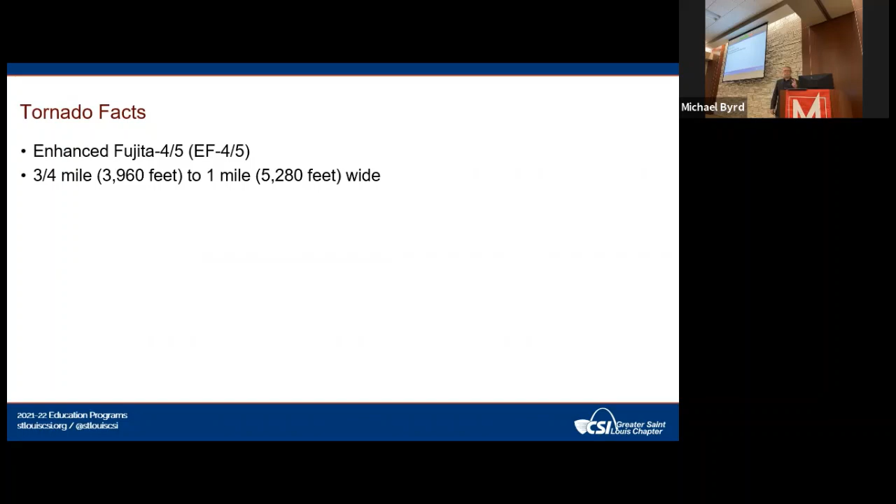It was 3/4 of a mile wide in the city, but it got up to a mile wide when it got outside the city. The total path traveled 22.1 miles from the city out to the east.

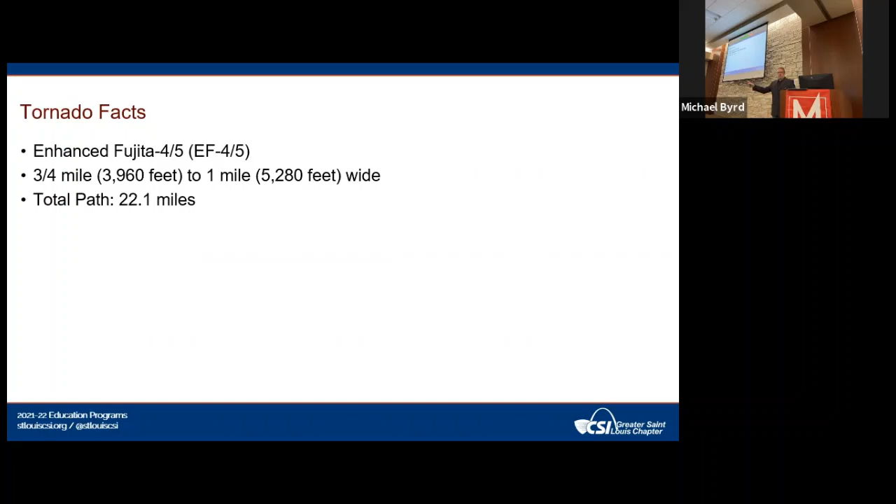The Joplin damage path was 3/4 of a mile wide and 6 miles long. It damaged over 30% of Joplin, and they calculate over 3 million cubic yards of debris were hauled out of that area afterward. The wind speed was in excess of 200 miles an hour, based on the damage they observed.

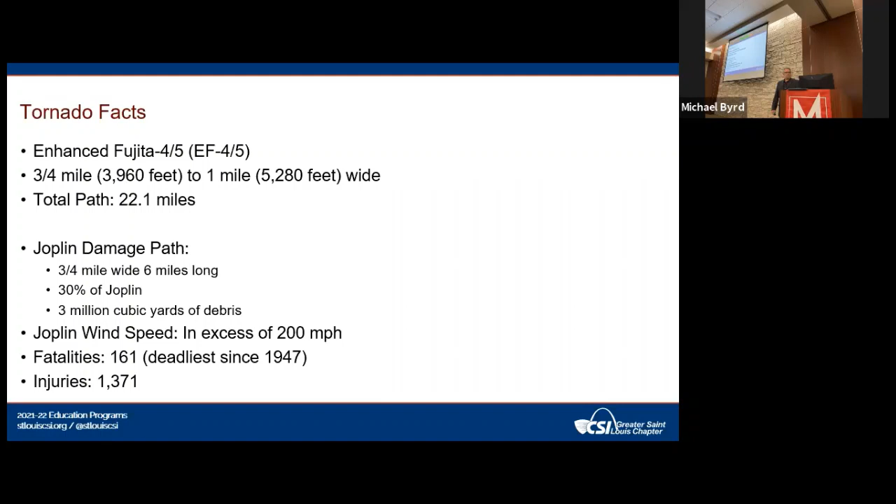Unfortunately, 161 people died—that's the deadliest tornado event in the United States since 1947. There were over 1,300 people injured in that tornado.

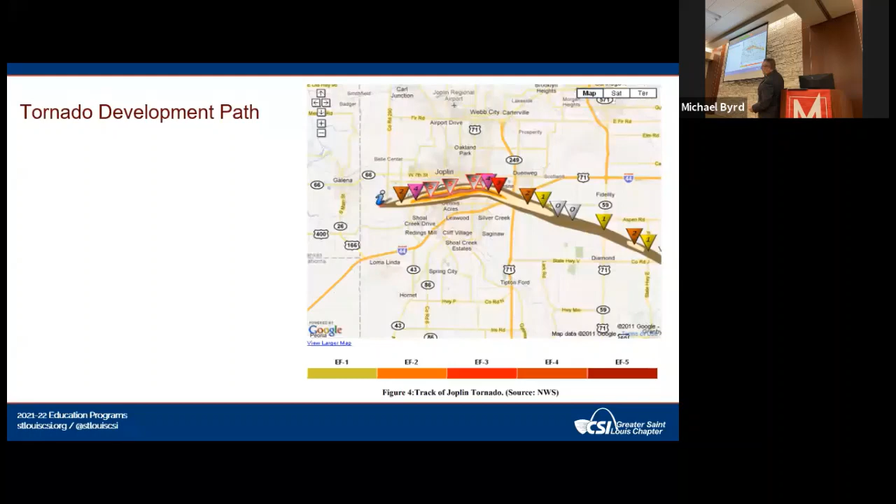22.1 miles long. This is the damage path through the city of Joplin. The red is the most severe area.

The reason I'm so interested in this tornado, I don't know how many of you are aware of the Missouri SAFE Coalition. Has anyone heard of that? Some, okay. The State Emergency Management Agency of Missouri had a law passed several years ago where they train architects and engineers on a volunteer basis to do structural assessment, visual evaluation. That's what SAFE stands for. When you do this on behalf of the State Emergency Management Agency, you are held harmless from anything you do during that deployment under their guidelines. So as a licensed architect, I cannot be sued if I were to do something in good faith representing the state of Missouri.

So I was down there doing some building inspections. And the red is virtual devastation. There's almost nothing. You'll see some photos.

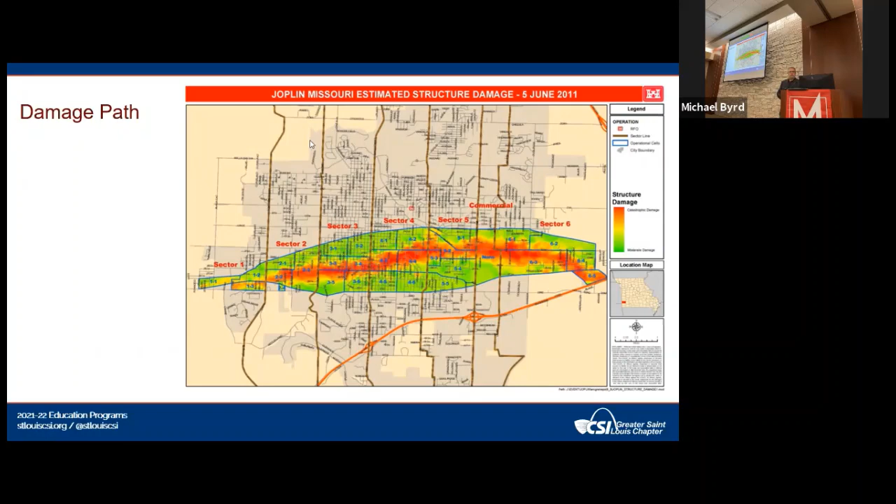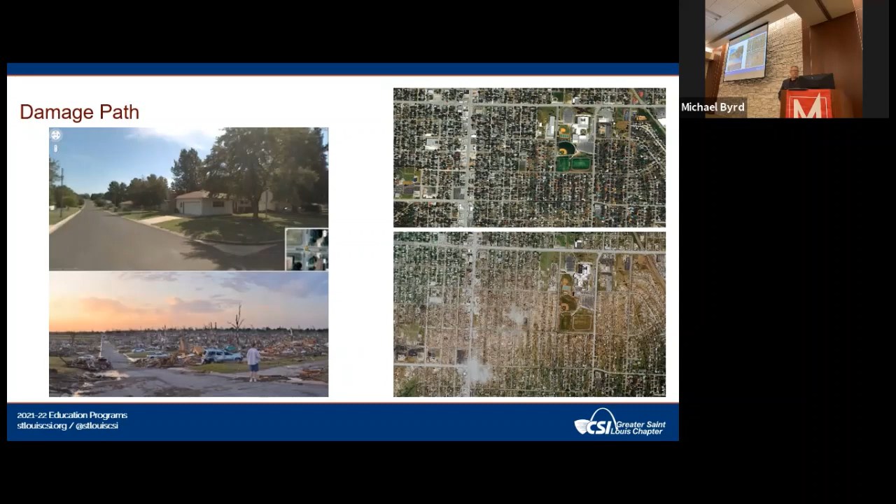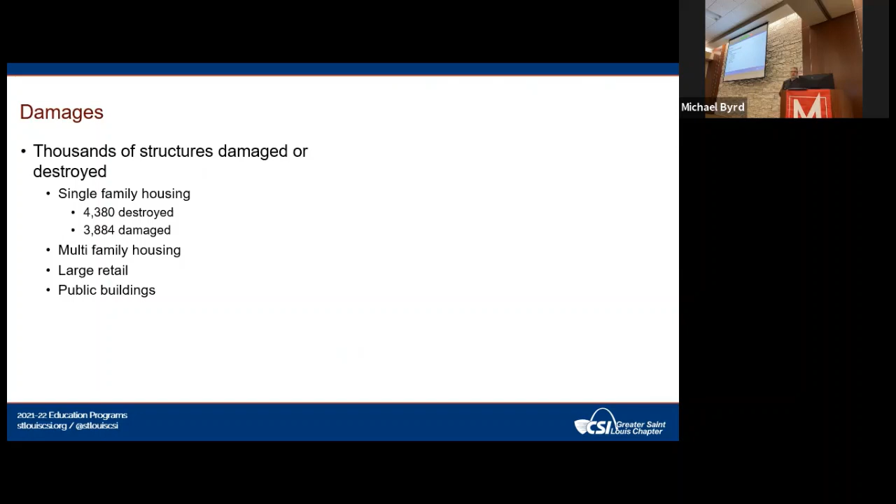So the damages: thousands of structures were damaged or destroyed. Single family housing alone, 4,380 were destroyed, 3,884 were damaged. Multifamily housing, there were a lot of apartment complexes there that got damaged. Large retail got damaged and public buildings got damaged.

The most notable damage you may have heard on the news - St. John's Regional Medical Center, Home Depot was destroyed. There was one wall standing on the Home Depot. Walmart was destroyed. Cell phone towers - there were 50 damaged that were not functioning, and 10 of them were totally destroyed.

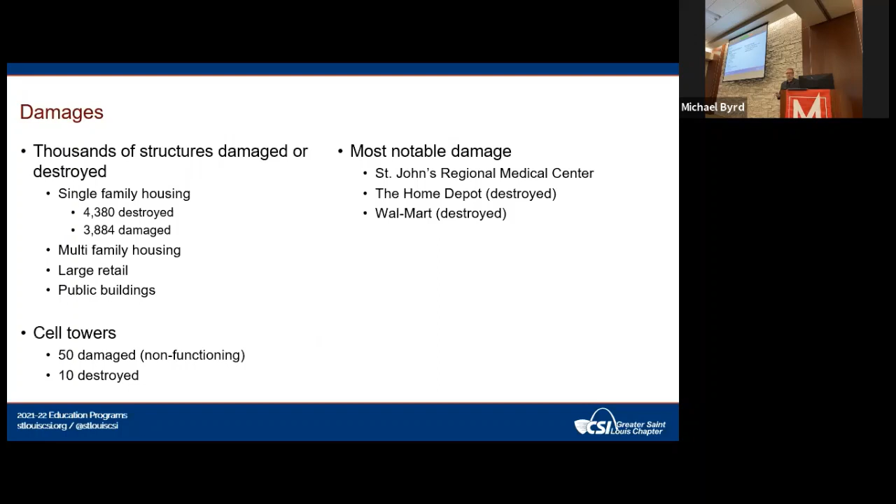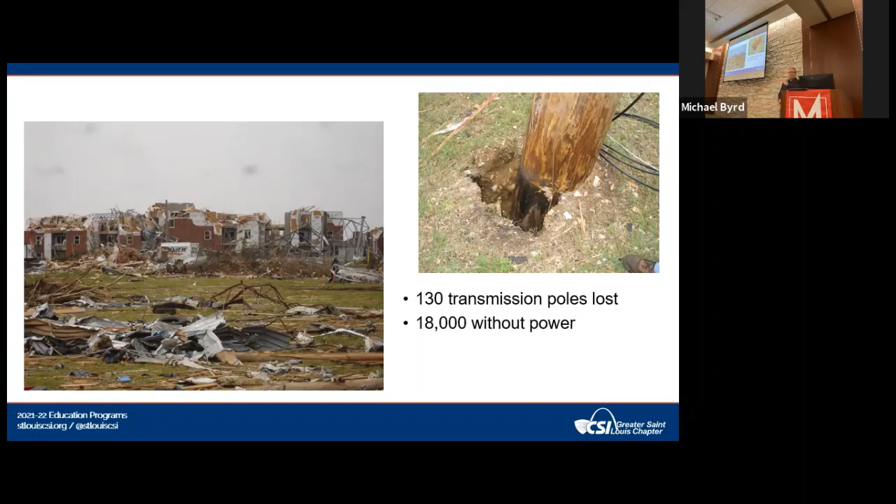This kind of shows you what happens. Here's a tower laying down right here on its side, fell across an apartment building. Standing next to this one, you can tell the displacement - the telephone tower, or the electrical pole, just got bent.

St. John's Medical Center is totally unsafe. They moved 183 patients out within 90 minutes of the tornado touchdown. They had nowhere to go with them. They found shelter for them. 5 patients died, mainly in the ICU, due to the electrical failure of the building. That is the main hospital in Joplin, and one visitor died from damaged debris in the hallways.

Working with SSE engineers who was down there at the time - at the time I worked across the street from them in Kirkwood, and SSE was down there evaluating the hospital. They said that the hospital itself was displaced off the foundation by a few inches. That building was moved a few inches off the foundation. I don't know what that was built on.

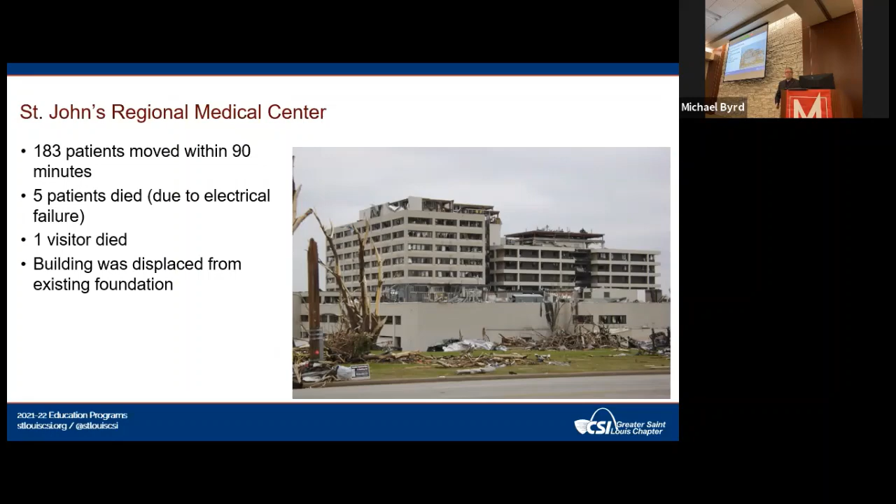Of the buildings, 38% were deemed totally unsafe. Of that 38%, I'd have to say 25% there was no building - it was just a foundation. 6% were accessible with restrictions, and 56% were green. That's how drastic it was from red to green. There was almost no in between.

You can see this on this map here. There's almost no yellow on this one. It's either a good building or a destroyed building. We didn't qualify - we just evaluated them by address and the city and what was at that address. So they just knew that it was a business or a residence, that business.

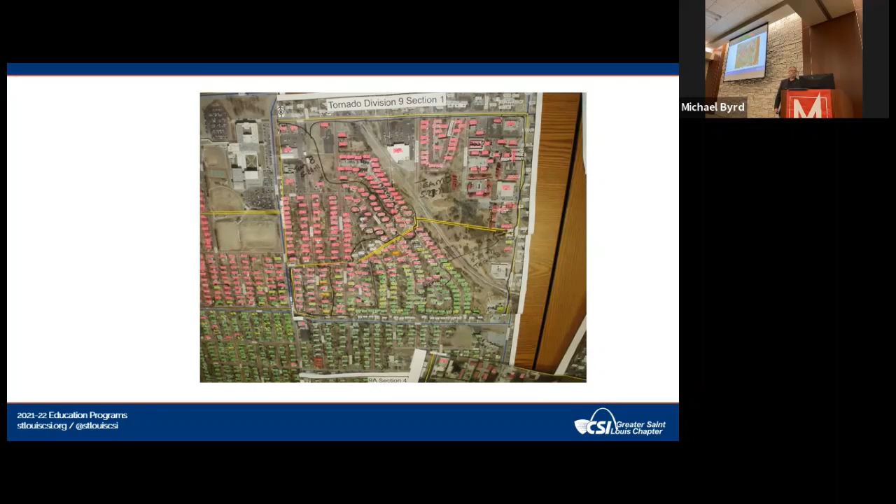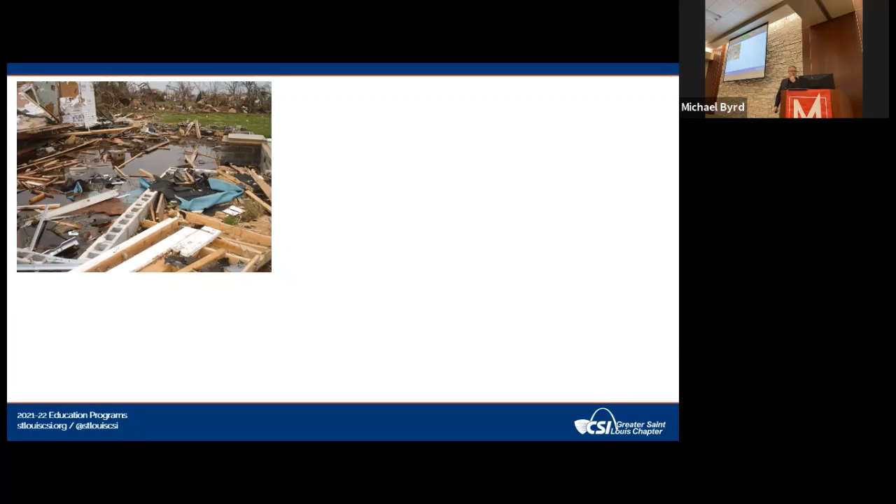And you're talking about proximate and root causes. Well, we know the proximate cause, right? Tornado. What's the root cause? Well, it looks pretty good. We got a sill plate, we got anchor bolts. Well, let's look a little closer.

Oh, wait. Where'd that course go? The entire course of masonry was just lifted up off of the adjoining course below. There was no reinforcing steel in there, nothing. The cells were not grouted solid. There's no basement in this house, it's a crawl space. But you can see where it was just picked up and moved.

And, upon further review, you can see where the floor joists were right here. They were probably just end nailed to the band board, and it was just set on the foundation. They weren't tied to the sill plate. So God just decided to move that house a few hundred feet, moved it over.

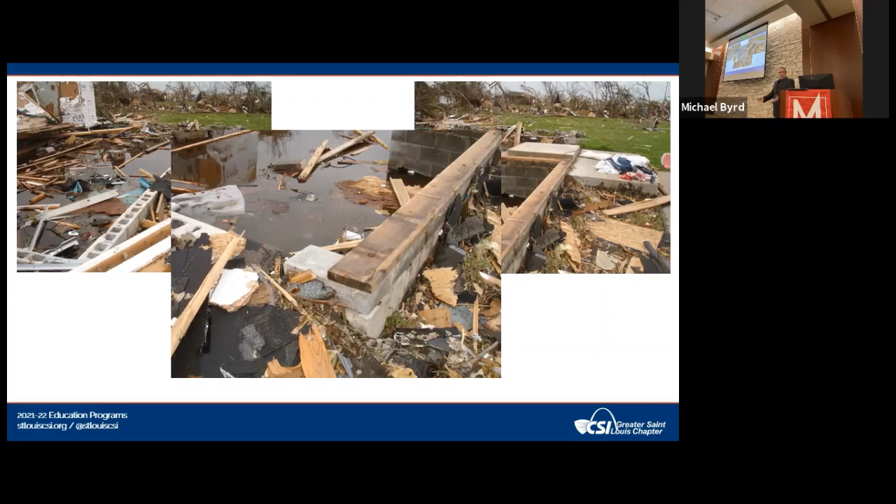This one was weird, okay? So this house and the one next to it, the white one you see in the background, we come upon this - remember that picture I showed you, that corner that had nothing in that foreground? Imagine that neighborhood, this house sitting right in the middle of all that. We're looking at that corner. Why is that house still there, with the garage doors damaged, looks like some shingles were ripped off, but why is that house still there?

So the two older gentlemen were on the front porch, and we walked up to them and just said, we're with the state of Missouri. We'd like to look a little closer at your house and see why it's still here. I mean, thank God you're here because they were older, they couldn't take care of themselves anyway, but they were giving water to everyone else around them. And they said, sure, no problem.

Well, we walked around the building and we discovered this. This is the back porch. See this metal strap right here? We asked them when they put those metal straps in. That metal strap goes from the wall past the band board to the foundation and connects it. So they've tied everything together. Their whole house was tied to the foundation, so it couldn't move. That's why that house was still there.

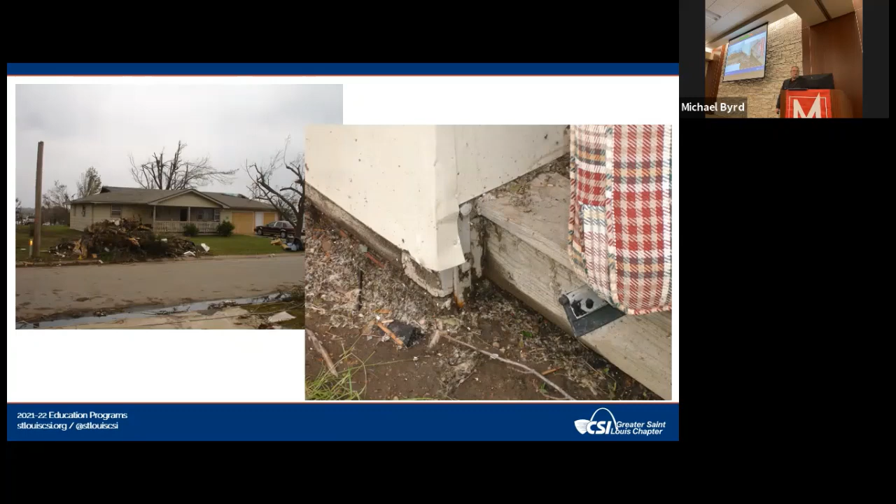So as a little teaser for you guys, in February, I'm going to talk more about proximate and root causes, because there's no one to blame here. I jotted down some notes when we were just talking, let me grab them here real quick. There's no one to blame. But what came out of this was a realization that we need to do things better, and a realization that we can protect ourselves because we do have the time to get into a safe location.

It's not like a hurricane. Hurricane sustained winds up to 150 miles an hour, maybe a little greater, maybe less. You've just got to sustain that for a few days. A tornado is instantaneous. It's on you and it's over. It could happen multiple times in the same day. Think of that - that same year, there were multiple tornadoes in Edmond, Oklahoma, and a few other locations.

And I'll show you some slides from Edmond, Oklahoma too, where the failure - these are from February, I'll come back to this - the copings failed. They were ES1 certified copings. They were designed to withstand tornadoes. They did. They just happened to be a couple blocks away, attached to the board, which was supposed to be holding them in place.

So it's all about construction and making sure that we design and build these things in the right way so that people can survive these events. One thing the hospital did - I was fortunate enough to be working with a company at the time that was asked to redesign the Joplin Hospital. And they said, can we make this building tornado proof? Well, we can't make anything proof. We can make it as tornado resistant as money will allow. How much do you have?